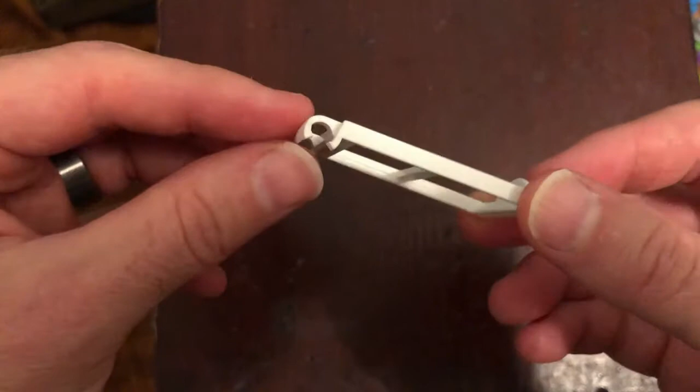Okay, so here's the part we want to recreate. And it may seem simple, and it's certainly a mass-produced, fairly inexpensive part, but modern manufacturing really is amazing, and it's easy to take for granted. So let's think about how we might 3D print this. Like every form of manufacturing, big or small, there are always trade-offs, right?

So this, like pretty much every other mass-produced piece of plastic, was almost certainly injection molded. They're a little hard to see in this lighting, but you'll see these slightly circular indentations, and that's a dead giveaway that this was injection molded. That's where the pins press against the part after it's been molded to eject it. So they push it out of the mold.

And that's great. You can get really detailed shapes very inexpensively. But that's an entirely different ball of wax than 3D printing. So if you want to 3D print a thing, the first thing I like to think about is what surface is going to be on the bed of the printer. So there's two good candidates here.

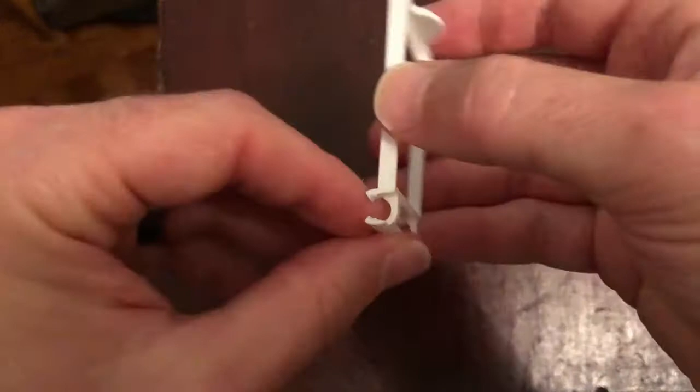We don't want to print it like this, right? If we print it with this surface here on the bed, we'd be printing it upright like that, and that would be a very weak part indeed. And similarly, this would be even worse, right? Tall, thin parts tend to be really wobbly, and you get a lot of inaccuracy. But we'd also have a rounded part at the bottom, so that doesn't give us any good base.

So theoretically, we could have a ton of support, but that would be really inefficient and probably would lead to a bad result anyway. So we know this surface is out and this surface is out. So printing it like this is much better. That's a lot more promising, because it's not very tall, so it's not going to be wobbly. So that's probably what we want to do, but there's some difficulties with that too.

So I'm just going to hide this half. If we only look at this half, this is actually a really good candidate for printing with this surface on the bed. If we think about how the layers will get laid down, going from here up, we don't really have much of an overhang. There is a little bit right here to clip onto an axle, but that's pretty much within tolerance. You can get away with a little bit of an overhang with 3D printing, so that's all fine.

But what happens if we look at this side? Here we have this tab that goes down, so that's not going to work. And there's an added problem: if we look at these crossbars, they're indented here and here on this side, and here on the other side. The reason is that a piece of cardboard slots in between, and that's what keeps the cardboard in place.

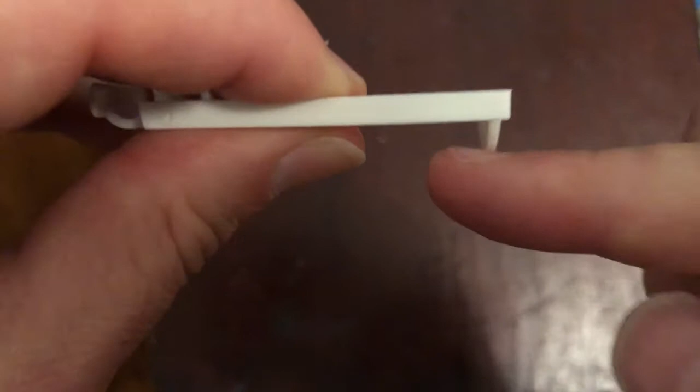Similarly, if we print with this surface down, we'd have from there down underneath the bed. So what I'm going to try is printing this in two parts. I'm going to split it effectively right along here and print part of it with this surface flat on the bed and the other part with this surface flat on the bed. And that should give us something that'll print really quick and print really well and give us all the features we really need, meaning that we'll be able to snap onto the cylindrical axle.

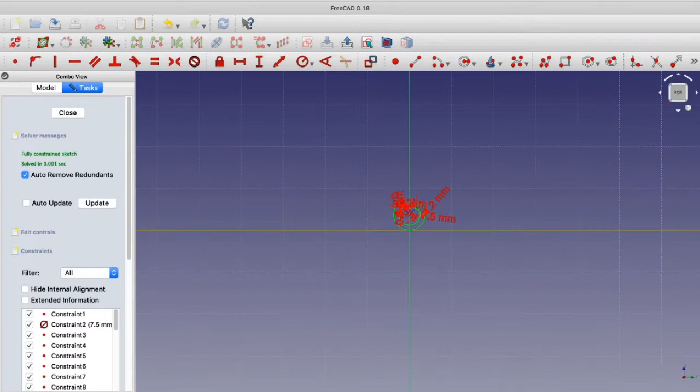We'll have this tab for flipping up and down, and we'll have a lowered portion here and here on this side and a lowered portion there on this side. So let's get to it. Okay, so here I am in FreeCAD. I started out by making a sketch of the cross-section of the cylindrical part that would clip onto the axle. You can see the little bits to hold the axle. Then I padded it to make it three-dimensional.

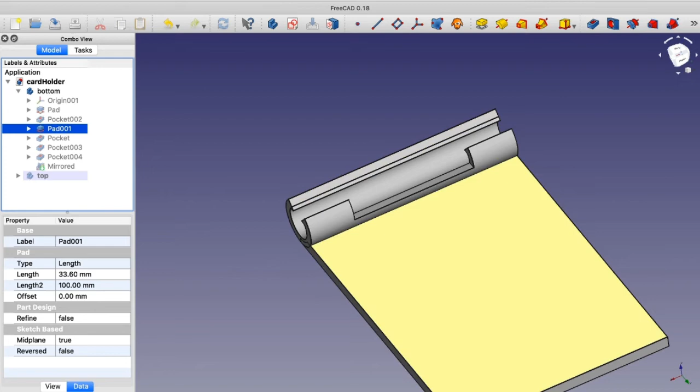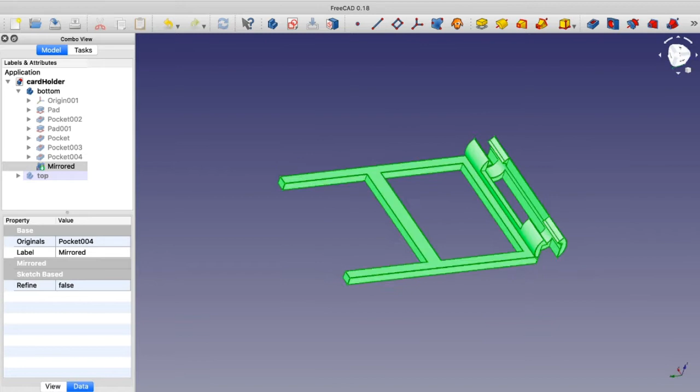I added a pocket to take a chunk out. Then I added the main flat bit, and with another sketch, I put some holes in it. Then I took some more additional chunks out of the main cylinder to bring it in line with the part as it exists. And that's pretty much it for what I'm calling the bottom. Next up was the other half.

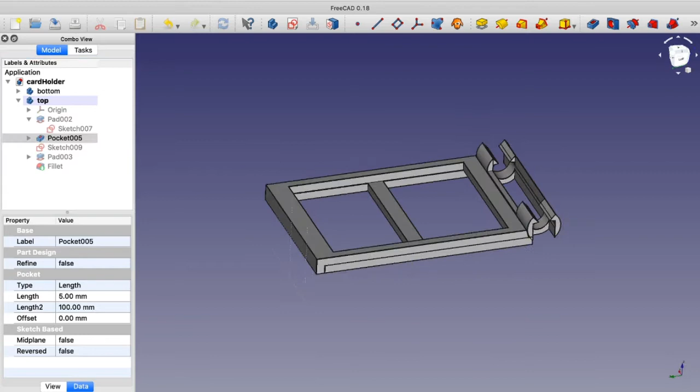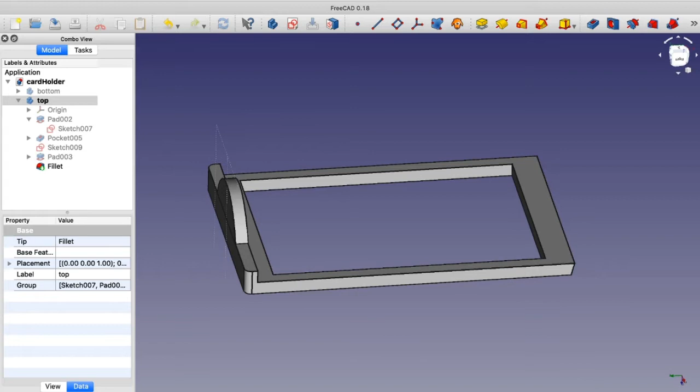So here it is all done, but I started out by making another sketch. It would fit just perfectly with the first part and give me the overall shape I wanted. And I extruded that out, padded it, and added a hole. Then I added another sketch and added the pull tab. And then finally, just a little fillet to make it nice. There I had both pieces, each of which would print nicely and fit together to give me the total part that I was going for.

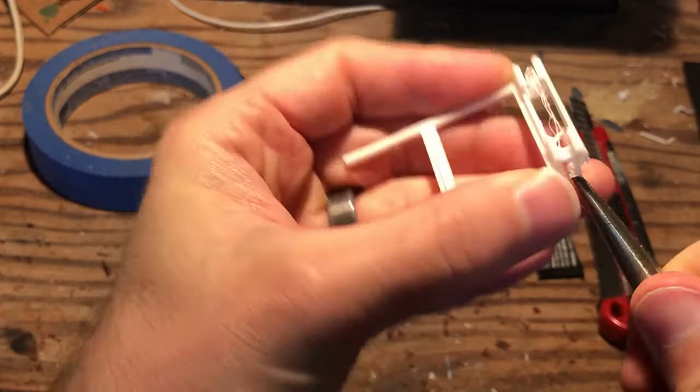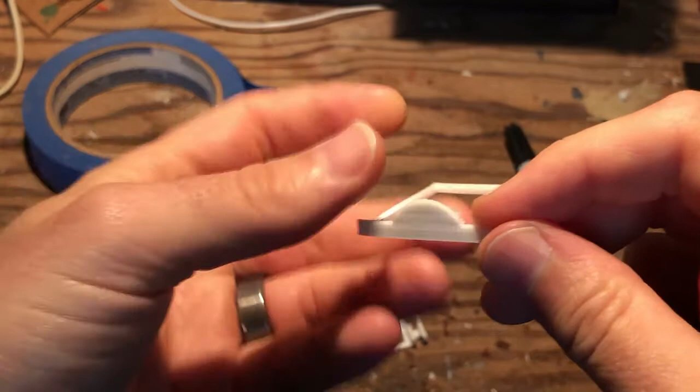Okay, so now I've got the two parts printed. I did print with support for the sake of this, but it's pretty easy to remove, so let's just do that real quick. There we go. And I'm just going to give it a quick once over, see if there's any strings that need to be trimmed. Okay, that's pretty good. Let's give this one a check. I have been getting a little bit extra right there, but that's easy to clean off.

Okay, so now we're ready to assemble. And that's really easy. All I'm gonna do is just glue these two parts together, like so. And then we'll have our finished part. So I'm gonna get my trusty super glue, and just put a little bead right along here and along there. Just using the side of the tip to kind of spread it out a little bit. And I'm going to put these two things together.

And that's pretty much it. All that's left is to let it set up. But in order to get a better result, I'm going to use a little bit of blue tape just to hold these things together and keep them aligned as the glue sets. So let's do that. And I'm going to be careful we have nice flat surfaces here, so I'm going to use those to my advantage to kind of help the tape get things nice and aligned.

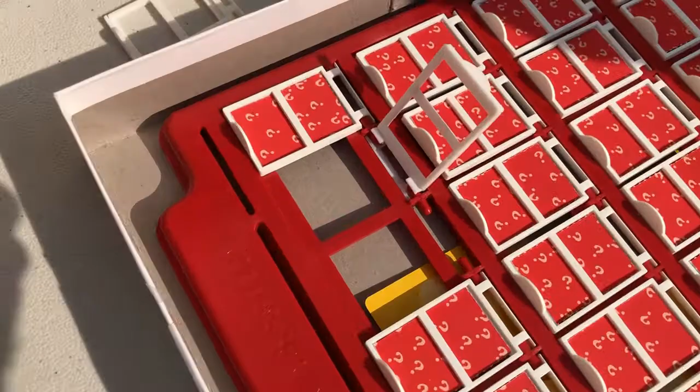So once I had everything put together, all that was left was to try it out. So I brought the pieces over to my friend's house and we snapped it in, and it fit perfectly. Oh yeah, perfect. Yeah, perfect. So that's about it.